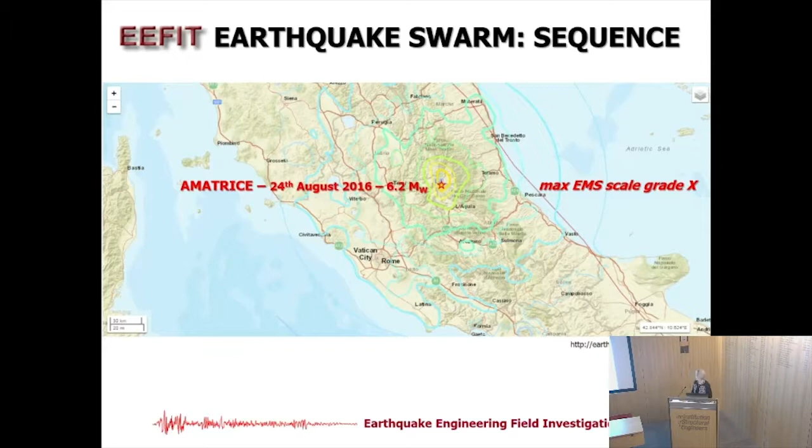Following that, there was a second series of events about two months later, the 26th and 30th of October. The second of these had a magnitude of 6.5, and the epicenter was some 50 kilometers northwest of the first one. Finally, this year, less than a month ago, on the 18th of January, there was a third event of smaller magnitude, 5.5, about 15 kilometers southeast of the first event.

As you can see, the three epicenters are basically on a straight line, which identifies the fault that runs through Monte Vettore, as we will hear later, and that is responsible for much of the seismicity of these areas.

The events of destructive magnitude, especially the first one, were of particular shock to public opinion because of the relatively high death toll—in fact, very high, almost 300 people—with respect to occurring in an area of very modest population density, around 15 people per square kilometer.

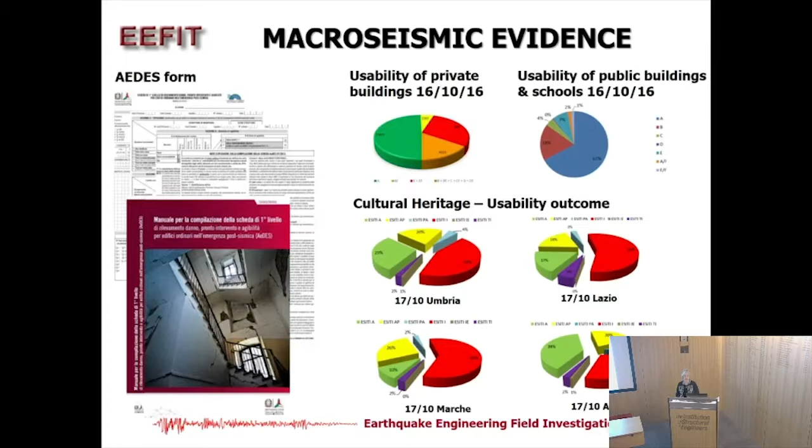On the basis of this, we drafted some first preliminary mission objectives, which I won't go through because they will be clear from the presentation of my colleagues tonight.

I just want to characterize the event a little more by going through the historical seismicity, presented here in terms of events over the last thousand years or so.

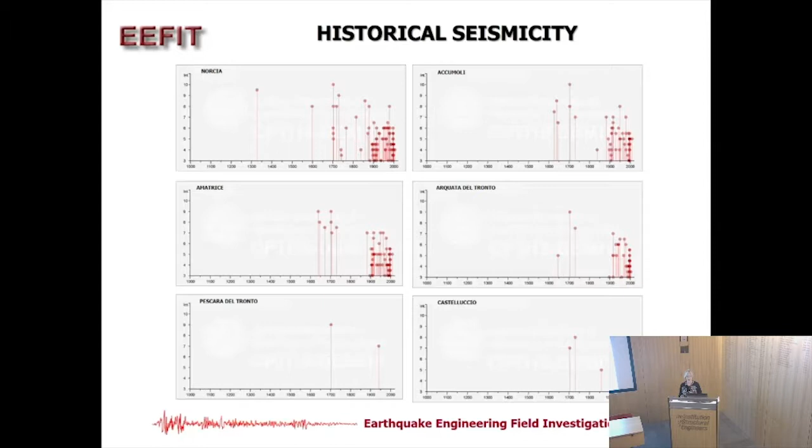We also correlated this with events in L'Aquila, which, as you might have seen from the previous map, is only about 30 kilometers east of the latest epicentral area.

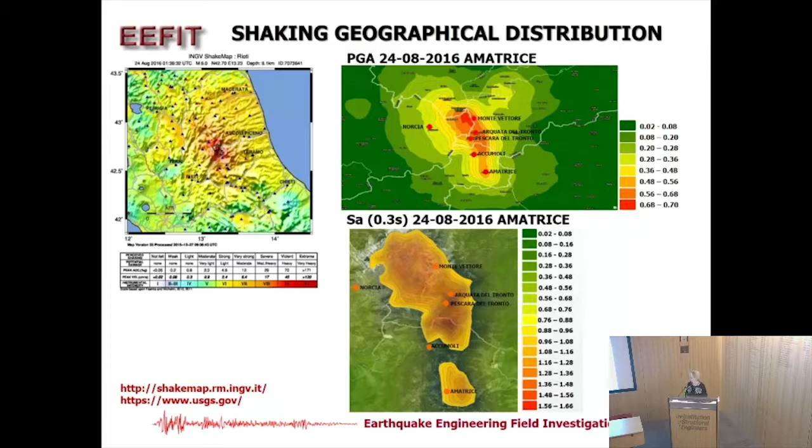This is even more evident when we look at the shake maps, like the one produced by INGV, the Institute of National Geophysics and Volcanology in Italy, and the isoseismal peak ground acceleration distribution at 0.3 seconds, which show very high values of acceleration in this case—among the highest ever recorded on Italian territory, up to 0.7 G for the peak ground, and up to 1.5 G for the maximum amplifications.

The second event, on the 30th of October, had smaller maximum accelerations but a much wider spread area, consistent with the greater magnitude, and also, as we will hear from Zoe, with the greater fault rupture and superficial evidence of this.

This is quite clear from this comparison, but you can see that, for instance, the maximum peak ground acceleration at Norcia was indeed the same value for the two events, although of course the grading is different because the scale is different.

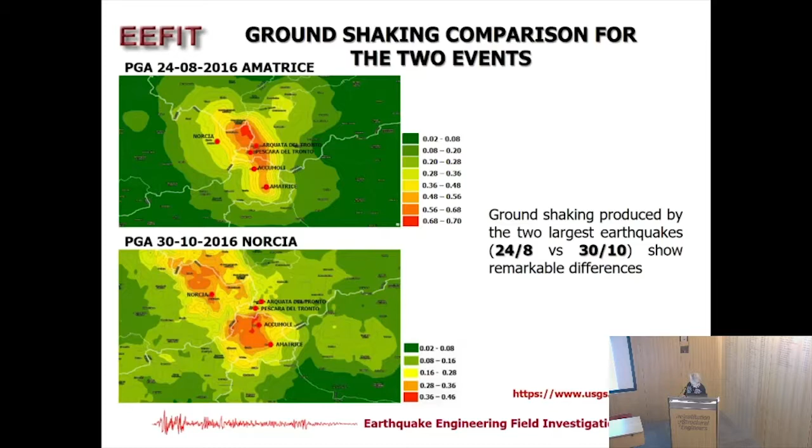In terms of further characterization of the strong motions, the Italian national network has some 350 accelerometers dispersed across Italian territory, which picked up the shaking. I'm not going to present all of these results, but you can access them at Itaca dot MI dot INGV dot IT, and these are indeed some of their results, some of their elaborations.

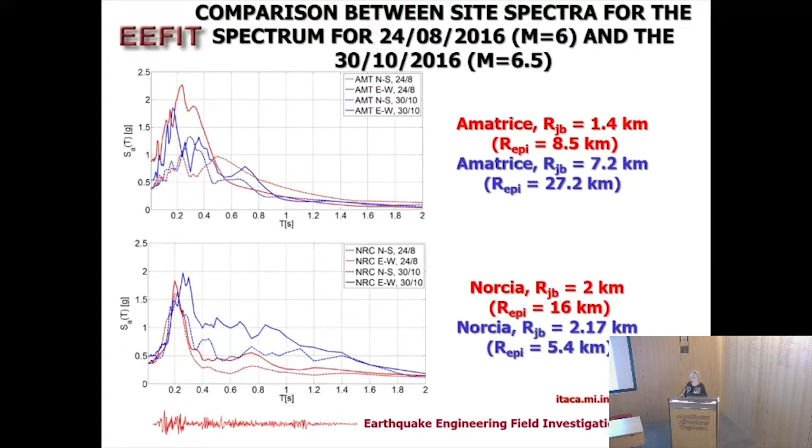Here we are simply comparing the two different events, and it's worth noticing that in the case of Norcia, the second event had a very high level of amplification in the high range of period between 0.4 and 1.2. This will be reflected, as we will see later, in some of the damage we have seen in Norcia in the cultural heritage buildings, and even more so when we consider the records taken by an instrument placed some 150 meters from the main square, very close to the two main cathedrals that collapsed, which Paolo will present later.

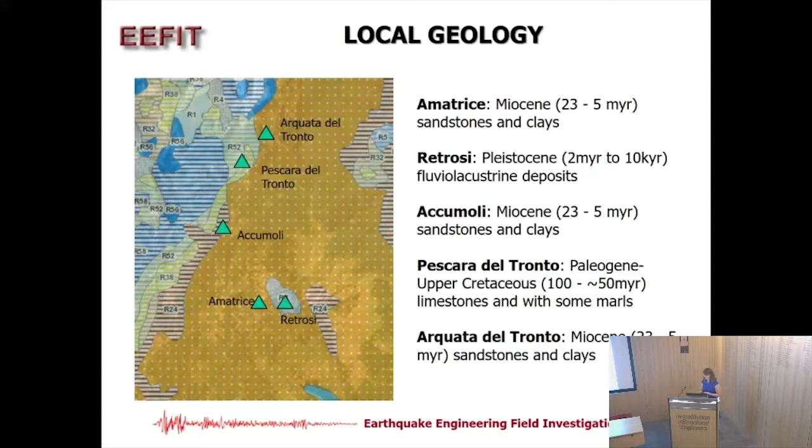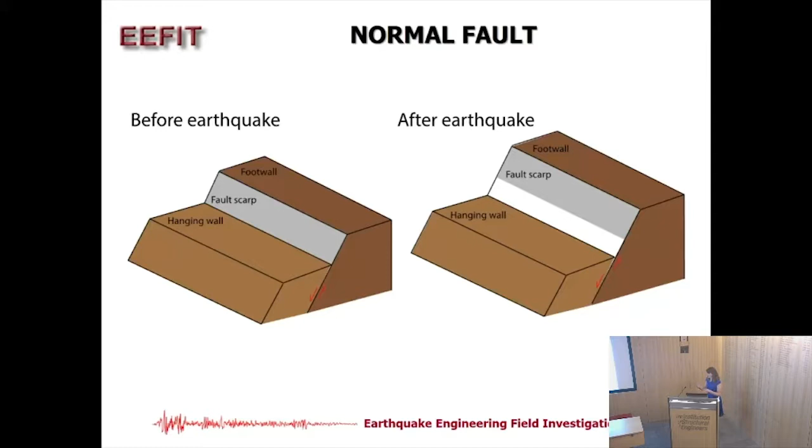A normal fault is shown in this block diagram. We have two sides to the fault. Usually the fault is orientated perpendicular to the extension direction. When the earthquake occurs, one side goes up and one side goes down, and so we can observe these breaks in the surface, which is what I'm going to show you and what we've measured.

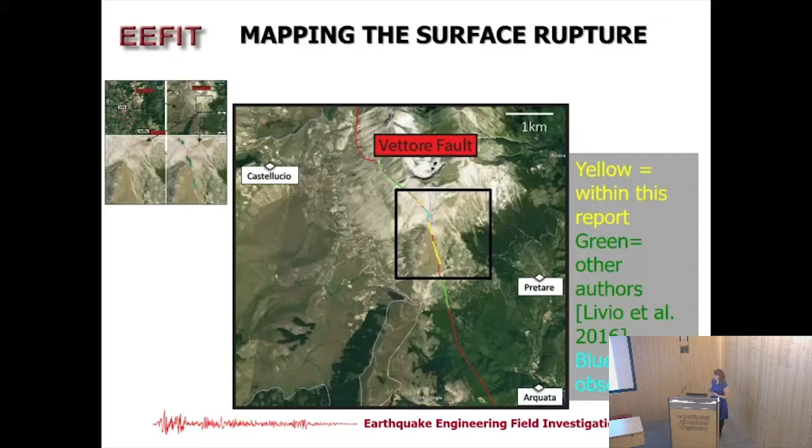This is the area that we focused on, so this is the town of Arquata down here. We focused along the southern part of the Monte Vettore fault. This was also in collaboration with other researchers who had previously been to the areas. We covered the area shown with the yellow lines, and this shows you the number of data points we took. We took hundreds and hundreds of data points.

So what were we actually measuring? This is what we see, with myself for scale. You can see this break, this crack in the ground. That is caused directly by the earthquake slip at depth coming to the surface, so this side has gone up and this side's gone down. So what we're measuring is the size of this offset, the direction in which the offset occurred, and the orientation of the offset.

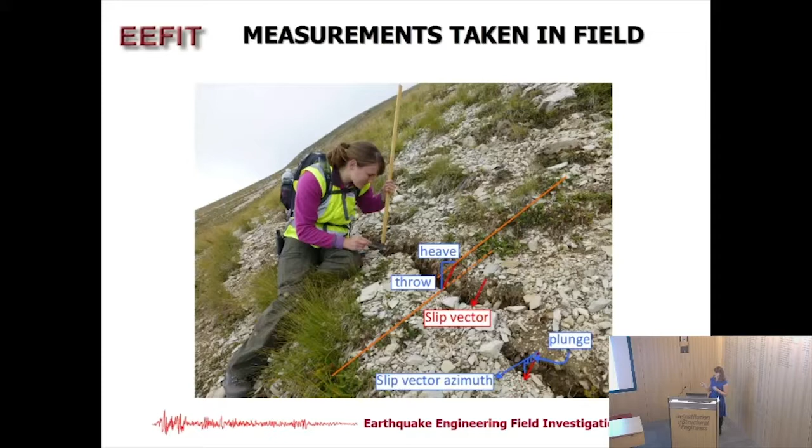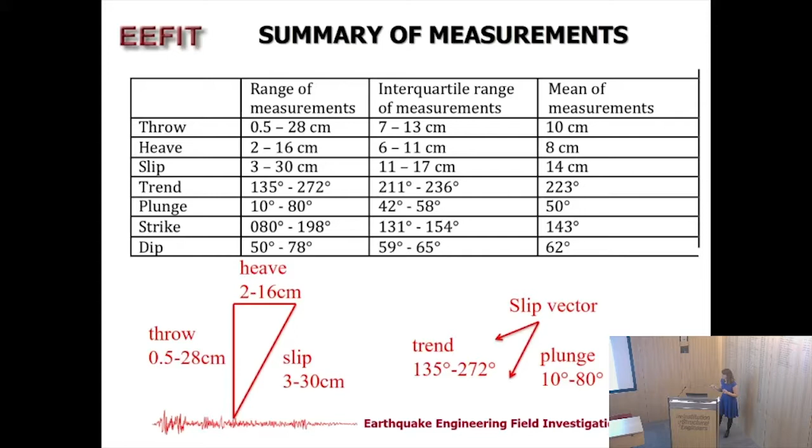This is just another photograph from a slightly different angle, so you can see how the two sides of this offset would join back to, or how the two sides separated. So this is just a quick summary of our measurements. The mean offset we saw was about 15 centimetres, but there's quite a large range, from about 3 centimetres to 30 centimetres. We also saw some other variations in the orientation and the opening direction.

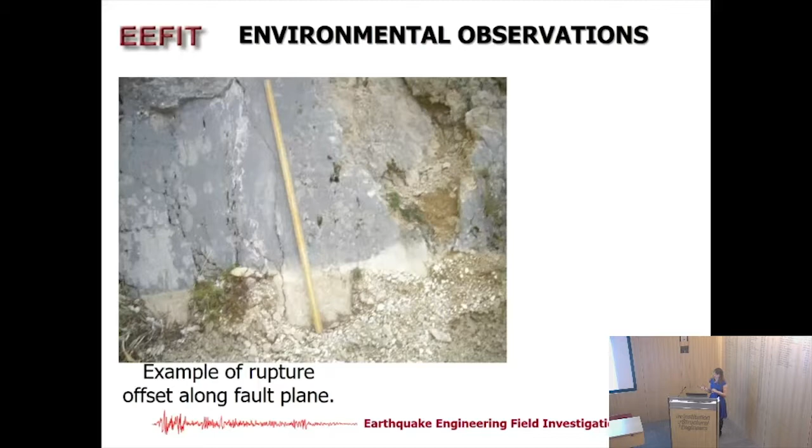And then this is a limestone fault plane, so this has been formed over many, many earthquake cycles. But if you look right down the bottom here, we zoom in, there's a change in colour from this grey, darker grey weathered rock to pale white rock underneath. That white section is what was exposed during the earthquake, so we can see really clearly what the height of this was.

So why do we care about doing this? It's important to look at the geometry of faults because the hypothesis is that the geometry and the strain across the faults and the stress across the faults are interrelated, which then will affect the seismic hazard of the fault. That's why we're making these measurements.

So remember I said that the maximum slip we observed during the EEFIT mission was 30 centimetres. For contrast, these are some field photographs from after the 30th of October rupture. I was in the field 2 days after this occurred with some colleagues.

This was the maximum that we observed, which was nearly 2.3 metres compared to 30 centimetres. At this location, we can actually see the two different earthquakes. You see this grey rock here was what was already exposed. That little pale white stripe, which is about 10 centimetres high, was from the 24th of August, which killed 300 people. And this section down the bottom, this slightly brown section, about just over half a metre, was from the 30th of October. So you can really see the difference between the different magnitude events.

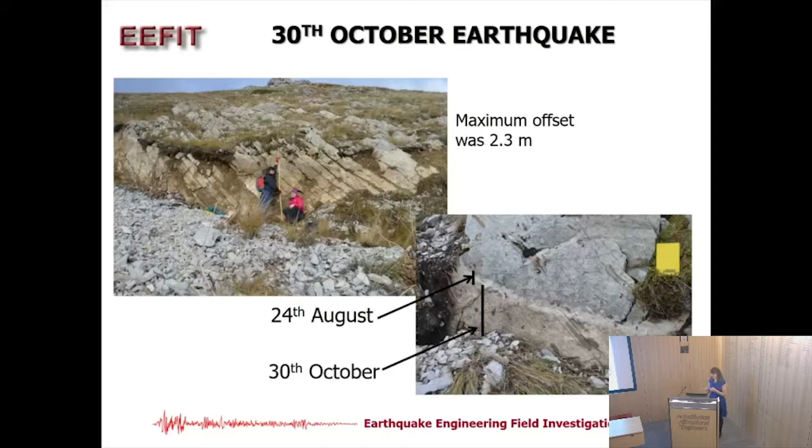So that's my section over, so I'm now going to pass over to Domenico, who will continue talking about the geotechnical observations. Thank you, Zoe.

Thank you. I am Domenico Lombardi from University of Manchester. So I will describe the geotechnical observations made during the EEFIT mission.

The main goals were to locate and characterize the secondary seismic effects. By secondary seismic effects, I mean the effects directly related to the ground shaking. We used these observations in order to determine the earthquake intensity through the environmental seismic intensity scale.

Before describing the geotechnical observations, let me introduce the environmental seismic intensity scale. So we are going to use this scale in order to estimate the macroseismic intensity. This is complementary to the Mercalli scale.

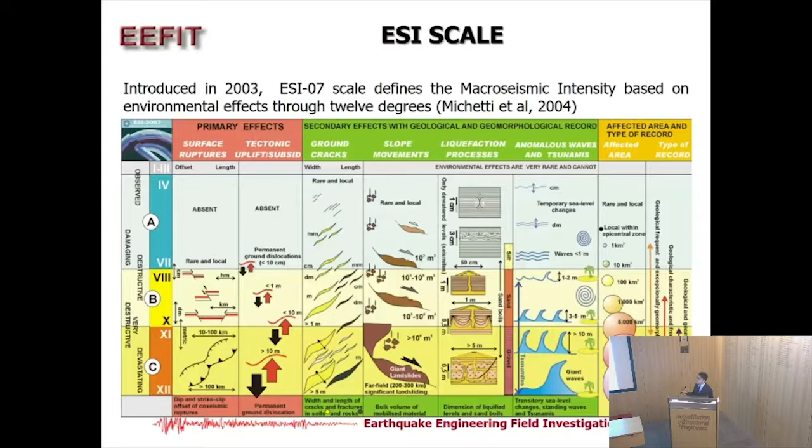We observed a number of landslides located in different areas of Pescara del Tronto, but we are going to focus on two main landslides. One occurred very close to the quarry.

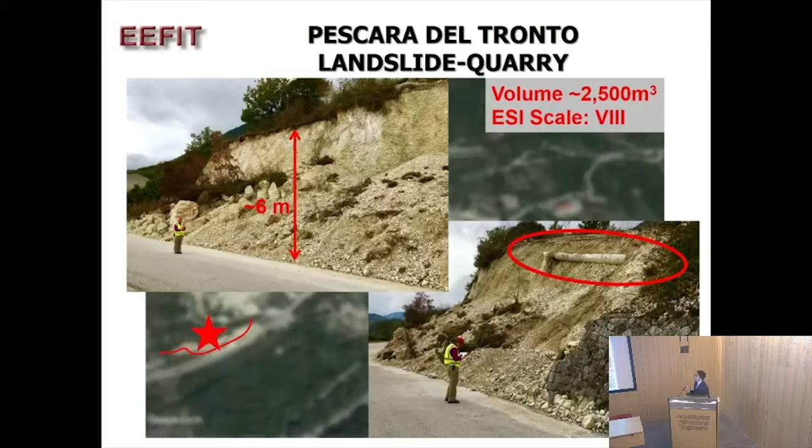Then we focus on a different location, again in Pescara del Tronto. This slope was facing directly over the Salaria Road. On the bottom left is a photograph taken before the landslide, showing the slope was quite steep and vegetated. The two photographs above were taken during the mission, showing the extent of damage.

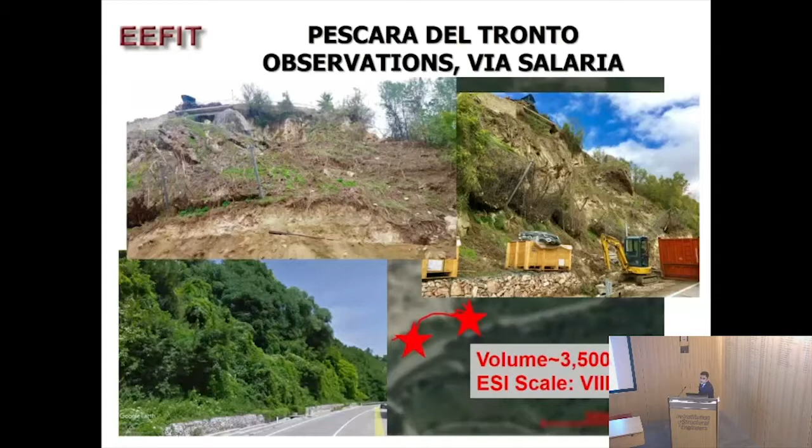Also in this case, the type of movement can be classified as a translational slide. The volume of material displaced was slightly larger than the previous case, about 3,500 cubic meters, which again corresponded to an intensity level of 8.

The quantity of material displaced was significantly larger, on the order of 10,000 cubic meters, which corresponded to an intensity level of 9 according to the environmental seismic intensity scale. Now, let me also touch upon the topographical effects.

Topographical effects are very important because ground motion can be significantly amplified by topographic irregularities. The concentration of damage in Arquata, which is located on the crest of a relatively high and steep ridge, suggested that topographic amplification may have played a major role in this high concentration of damage.

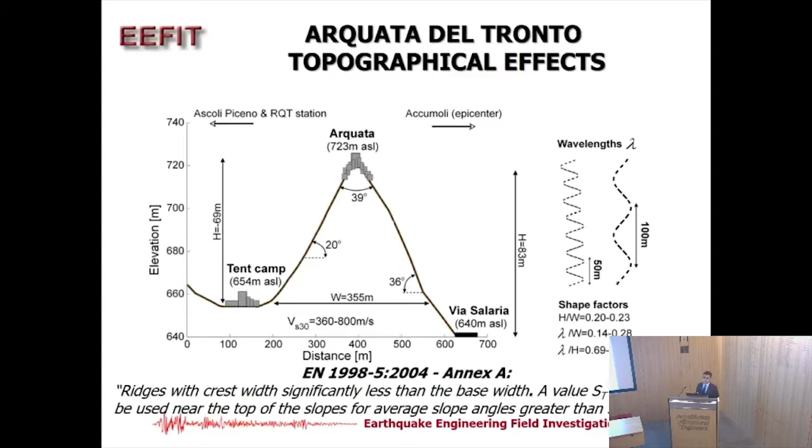We also surveyed a number of dams. In particular, I'm going to focus on the Campotosto artificial reservoir, which is worth mentioning as one of the largest artificial reservoirs in Italy. It is impounded by three dams: one earth dam located to the northwest in Poggio Cancelli, and two concrete dams, one in Rio Fucino and one in Sella di Pedicate.

We didn't observe any significant damage to the dams, and we are not aware of damage caused by subsequent events. However, there are major concerns because of the presence of an active fault, which is crossing the concrete dam in Rio Fucino. I will now hand over to Valentina.

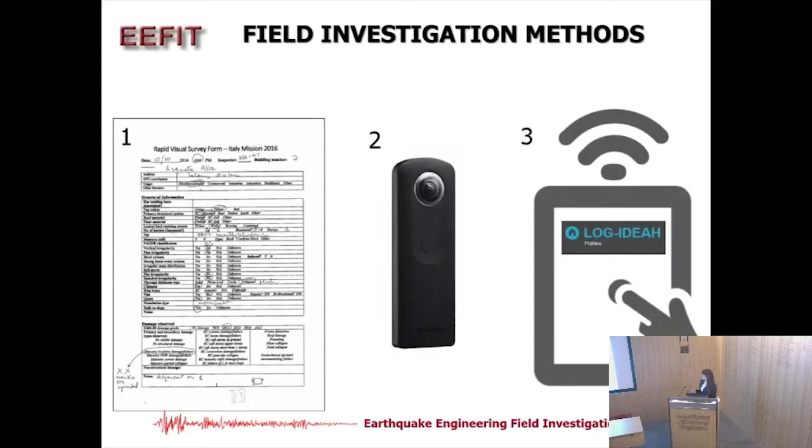The three main investigation methods we used on site were rapid visual survey form, omnidirectional cameras, and the web-based knowledge expert tool called LOG-IDEAH.

Rapid visual survey forms have been extensively used in other EEFIT missions. In our case, we tailored our form to accommodate the information needed for the Italian building stock, both masonry and concrete structures.

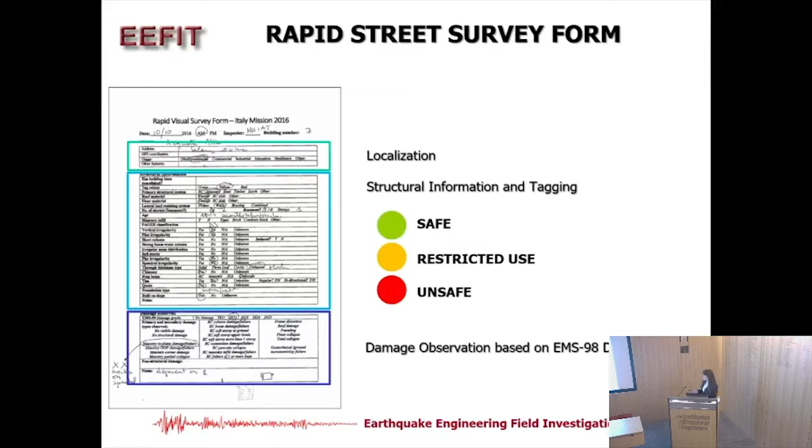It takes no more than 10 minutes to be filled and is made of no more than 30 entries, and is divided into 3 main sections: localization, structural information and tagging, and damage observation based on the European macroseismic damage scale.

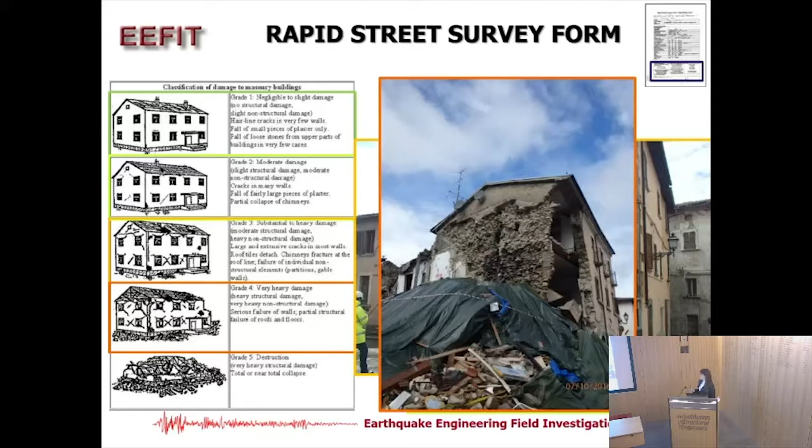360 cameras came to help when the time to be spent on site was very limited, especially in red zones such as Amatrice. If collected in sequence, 360 images can be uploaded on platforms such as Mapillary and then reused to review collected data or eventually integrate missing data.

It has been used for the first time during the 2011 7.2 Van earthquake in Turkey, and it has extensively been improved since then, and it was also used during the last EEFIT mission in Ecuador.

And finally, LOG-IDEAH, which is the web-based knowledge expert system for damage collection and failure mode identification based on logic trees for identification of damage due to earthquakes for architectural heritage.

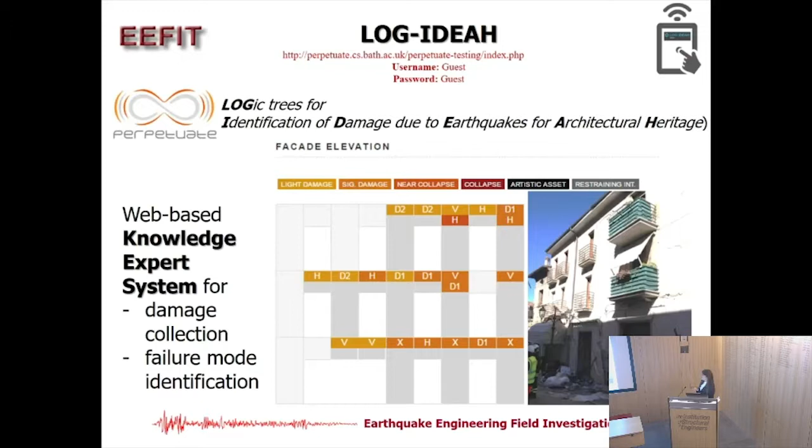It has been developed by Novelli and D'Ayala within the Perpetuate project, and it has been extensively used during other case studies such as L'Aquila, Algeria, and Slovenia, Ljubljana. It is open source and readily available online.

So what were the limitations we encountered when we were on site? First of all, the very limited time to be spent within red zones, the very limited access to buildings, and the very widespread level of damage.

In terms of rapid visual survey results, we plotted our results based on the tagging classification and the EMS-98 damage scale. What we understood was that the level of damage that we recorded was quite widespread, as well as quite different among the cities we had the chance to visit when we were on site.

Especially if we look at the case of Arquata del Tronto Bassa, more than 60% of the buildings were rated as safe buildings, and only 40% of the buildings as restricted use.

Few meters away from Arquata del Tronto Bassa, in Arquata del Tronto Alta, more than 80% of the buildings were rated as restricted use, with only a few cases of safe buildings and completely collapsed buildings.

The major number of buildings that were rated as unsafe was in Amatrice and Pescara del Tronto.

In relation to the damage that we collected on site, and according to the European macroseismic scale, we were also able to give an intensity degree to each one of the cities we visited.

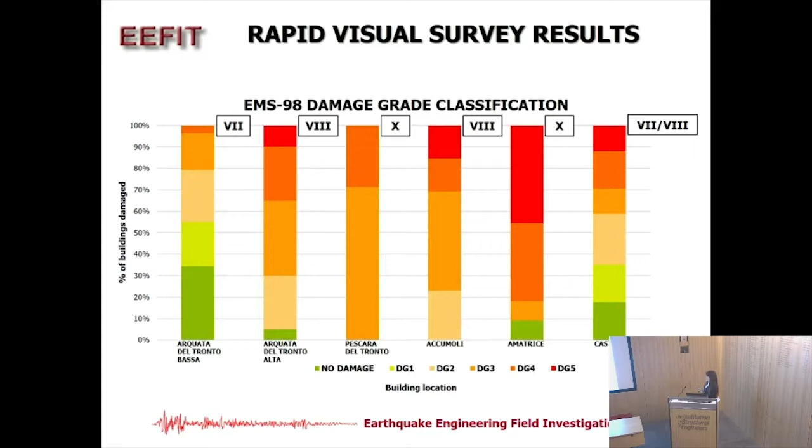For instance, in the case of Amatrice, the level of damage was graded 10, as well as Pescara del Tronto. In the case of Arquata del Tronto Alta and Accumoli, the intensity grade was 8, and in the case of Arquata del Tronto Bassa and Castelluccio, the damage grade was 7.

We then mapped our results to see the extent of improvement going from the damage we collected through rapid visual survey, to the data we were able to improve by using 360 images.

We then compared it with the available online satellite images, the satellite images provided by Copernicus, which is a service that activates in the aftermath of any hazardous event, providing information and aerial views of the damaged area.

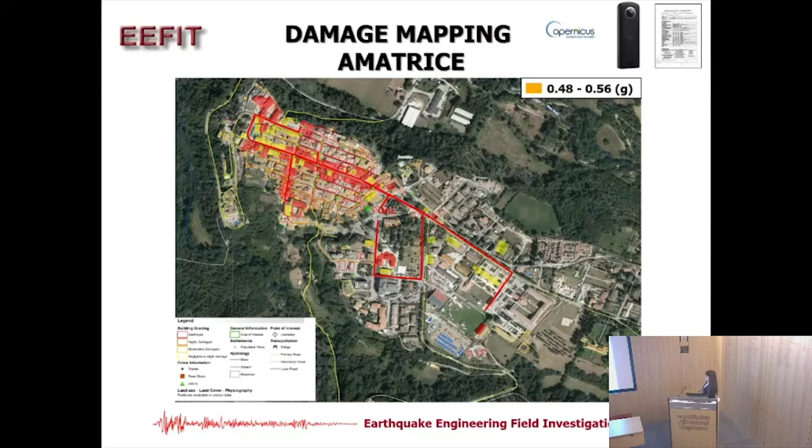In the case of Amatrice, where the extent of damage was quite widespread, the two layers of map were corresponding quite well, as in Pescara del Tronto, where the two layers of map were also able to correspond quite well.

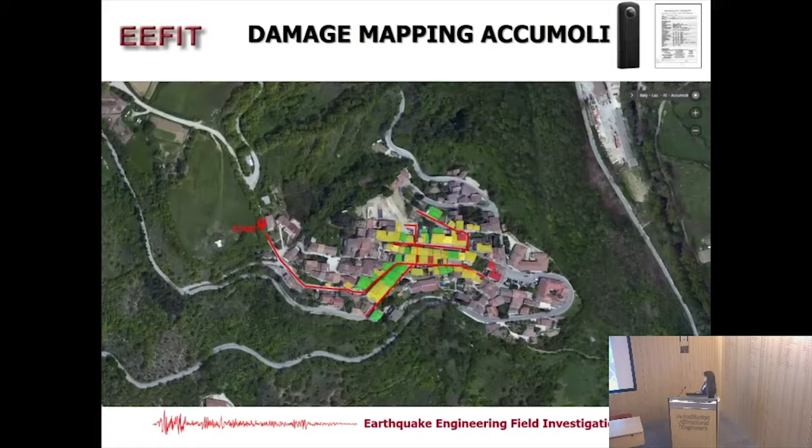The difference stays in Accumoli, where, of course, the extent of damage was far less compared to the previous cities. As is possible to see from the overlap of the two maps, the extent of mismatching is quite important. The same in Arquata del Tronto.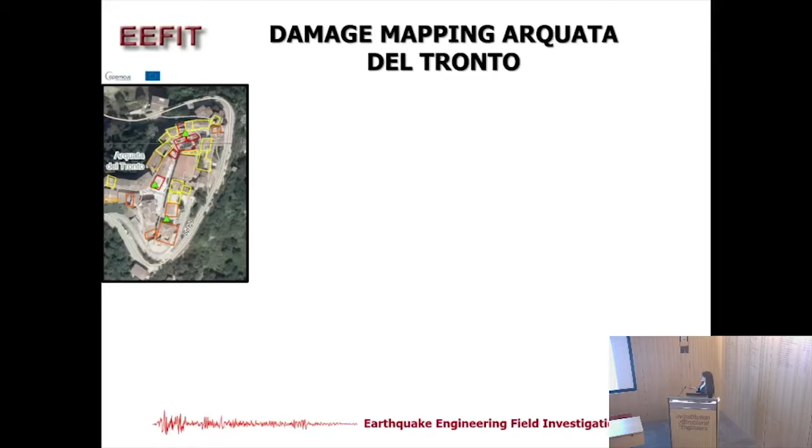In this case, we pointed out this building, which is the City Hall building located in Arquata del Tronto Alta, which, based on the Copernicus map, wasn't even marked as potentially damaged, while when we were on site, we were able to see the real extent of the damage of this building.

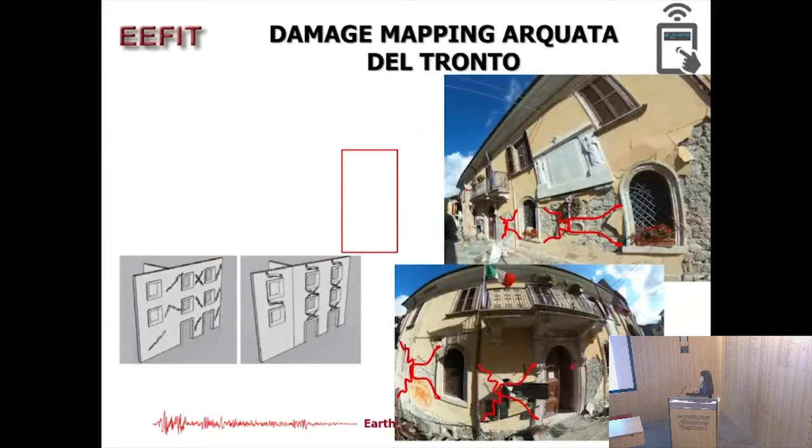We analyzed it using LogIdea, which, based on the geometry of the building itself, the layout of openings, and the position of the cracks, was able to give us the most probable collapse mechanism for this particular case, which is actually the in-plane failure of piers and spandrels characterized by X-shaped cracks, which we were able to see on site.

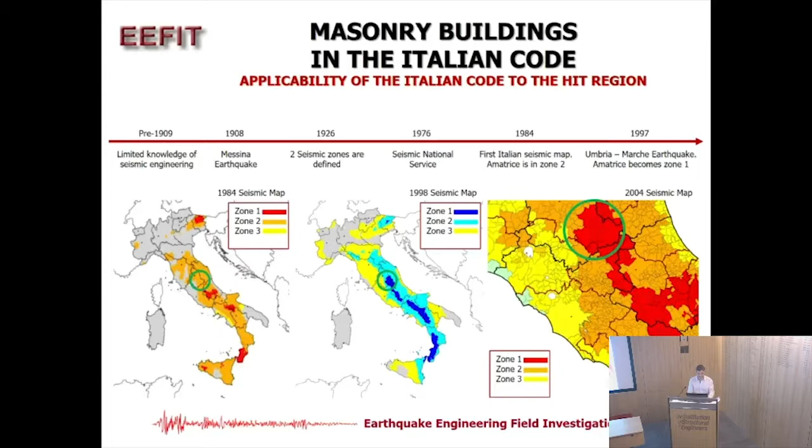In this first slide, we would like to understand the development of the Italian seismic code during the 20th century. After the Messina earthquake, there was a big push in terms of research and codes being deployed in Italy. For example, in 1926, two seismic zones were defined, but it's only in 1984 that Amatrice was classified as seismic for the first time, as seismic zone 2. Then in 1998, Amatrice was classified as seismic zone 1.

In terms of code requirements from the Italian Seismic Code, we have analyzed both the currently applicable NTC08 and also the codes that were in use during the 80s. The idea here is to provide a benchmark of what an ideal masonry building should look like, and then to assess the observations and damages against this benchmark.

So in terms of structural concept, of course there is a recommendation for regularity. The building should be as much as possible symmetrical in plan and regular in elevation. This is not compulsory, but it's highlighted and recommended by the code.

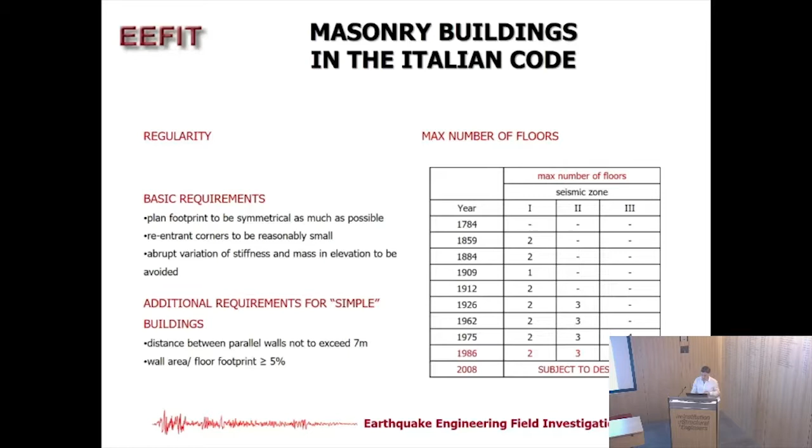In terms of requirements for the materials, it is important to notice that brickwork with artificial squared blocks in concrete or hollow pots are allowed. Squared natural stone is allowed, but unfortunately in Amatrice rubble masonry is not permitted, and by the way, it was not permitted to have buildings more than 2 stories even during the 80s, in the DM86.

As we have said, Amatrice only became seismic in 1984, so all the prescriptions we have seen so far were not really applicable in Amatrice before 1984, and therefore it is worth understanding what strengthening measures for existing buildings were prescribed in the DM86.

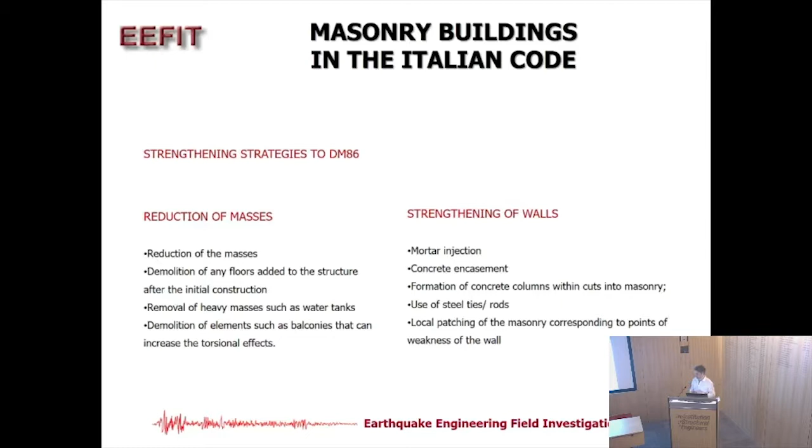Obviously there are two strategies. The first is the reduction of masses, which in honesty we have not seen on site. The second is the strengthening of the structures and the walls. There are many possible approaches. The first was to build concrete ring beams at roof level in order to tie all the masonry walls together and enhance the box behavior of the structure.

A second approach would be to provide a concrete encasement to the masonry walls in order to improve the confinement, which would be beneficial especially in case of cavity walls. And then again, mortar injection to enhance the mechanical characteristics of the walls, or steel rods that would prevent the walls from falling out of plane.

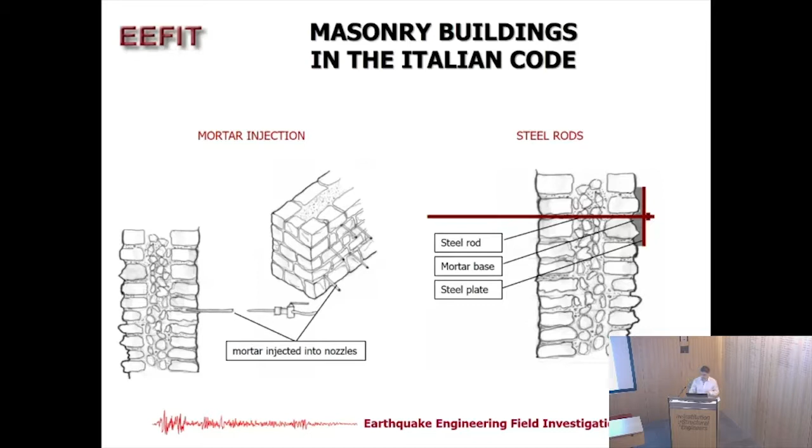Now, this provides again a basic benchmark for the ideal buildings or the technologies that were in place to strengthen an existing building. What we have observed on site during our mission is slightly different from what you would expect for a new building in Amatrice today, and this can help explain the reason for such a level of devastation.

In terms of number of floors, both in Amatrice and Accumoli and Arquata del Tronto and Pescara del Tronto, we have seen buildings up to 3 and 4 stories, so 15 to 16 meters.

Many 2-story buildings, but unfortunately many 3 to 4 story buildings, and this is a major key driver to explain all the damages that have occurred.

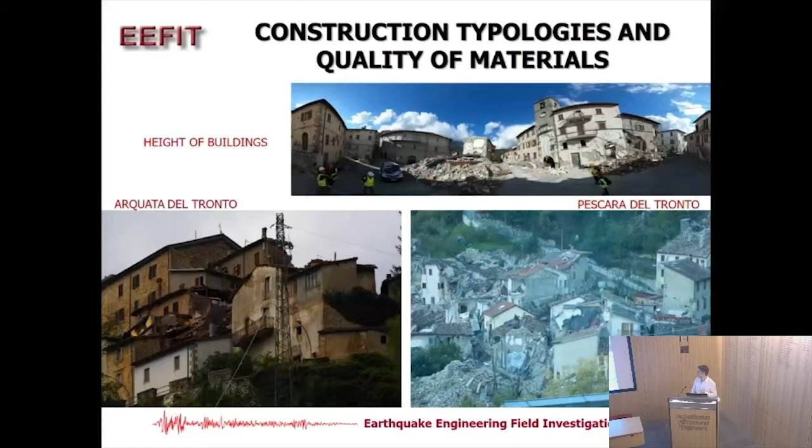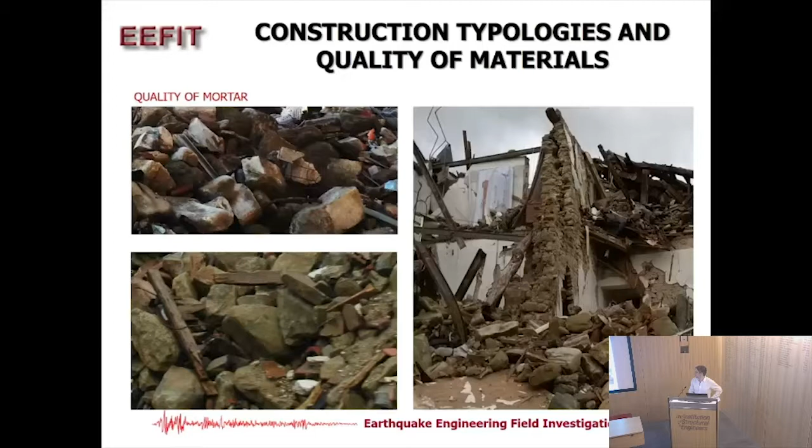In terms of quality of materials, we have seen very poor quality, especially in terms of mortar and use of natural stonework with non-squared rubble masonry. This is also very relevant to explain the extent of damaging. As you can see from these pictures, the mortar was absolutely ineffective, and all these buildings have collapsed as a result.

In terms of damage observation, we have seen a number of different damages. In all those cases where the buildings could behave as a box, it has behaved slightly better than others. Although we have seen so many cracks, at least the building is still standing.

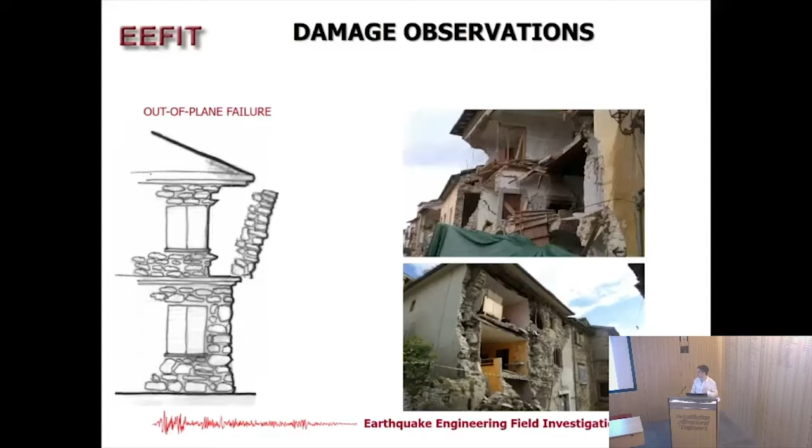While in other cases where we have seen out-of-plane failure of the masonry walls, obviously in many cases this has caused casualties and the full collapse of the building, as you can see in these pictures.

So, to summarize, in terms of the existing buildings, it's possible to say that the bad quality of the materials and the fact that the buildings were too high can be described as the two main reasons for this level of devastation. Now, in terms of strengthening of existing buildings, we have described the various methodologies.

What we have seen on site is that basically there has been a shift between the technologies that were used in the 70s and 80s, and then after the 1997 Umbria and Marche earthquake, a different set of technologies have been used.

In the 70s and 80s, there was a big degree of confidence about concrete, and therefore many concrete encasements and ring beams. But unfortunately, in this case, the use of ring beams has been done in a non-appropriate way, and in fact, a concrete ring beam has become a concrete roof, and this was quite a usual type of situation on site.

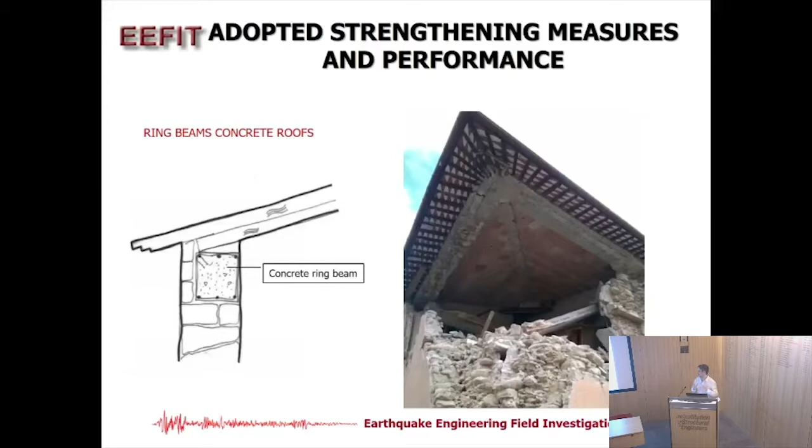So many buildings have collapsed because the ring beam and concrete roof has replaced the existing timber roof, and this is one of the results, for example. So these two approaches, the concrete encasement and the concrete roofs, have proven not efficient and counterproductive somehow.

On the other side, mortar injection and steel ties have proven slightly more performant. For example, with mortar injection, here we can see two pictures. The second one at the bottom shows that the building is almost undamaged, adjacent to another building that has collapsed in Arquata del Tronto, and the first one in Amatrice. There are obviously cracks and damages, but again the building is still standing.

In some cases, especially when steel rods have not been used together with mortar injection, the results have not necessarily been positive. For example, the picture on the left shows that the steel rod is overstressed and the building has collapsed.

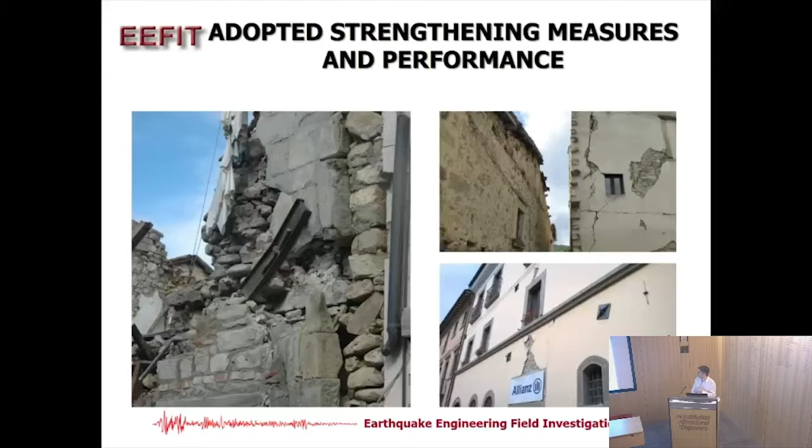On the right, we can see there is an incipient out-of-plane failure of the facade.

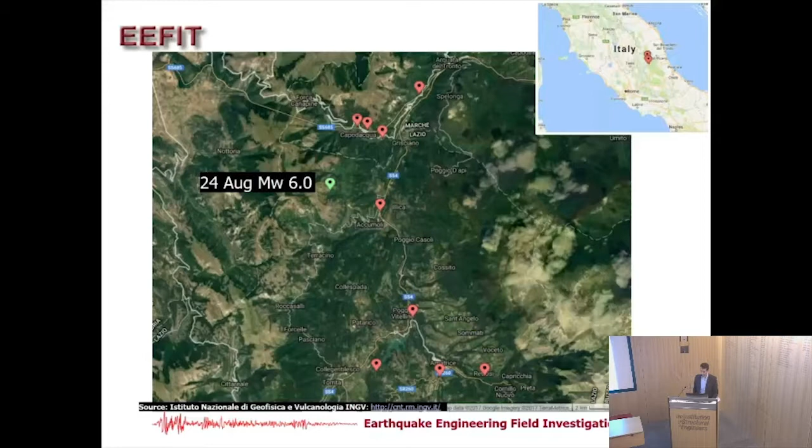This is a map of the area you'll be familiar with, and each single red point shows one of the bridges, one of the structures we had surveyed. We won't see them all tonight, unfortunately, but this is just to give a flavor of the type of structures we observed. We see masonry bridges, which are the ones that suffer the most, and a range of concrete bridges, particularly concrete viaducts on highway structures.

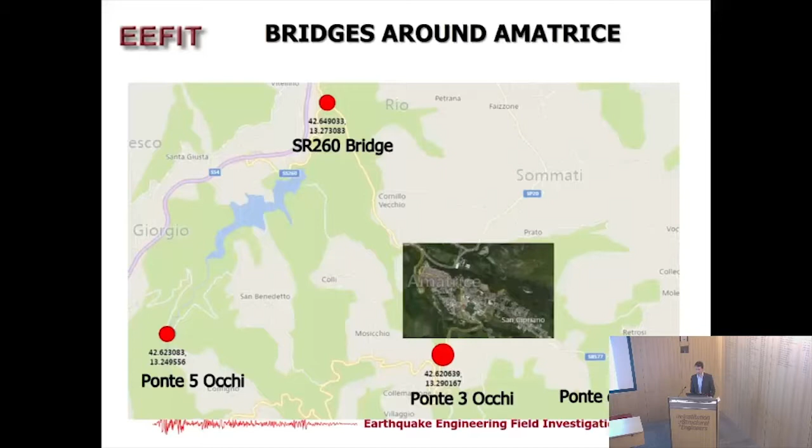We will focus around this town of Amatrice, where we observed a range of bridges in the surrounding area, and each road leading into Amatrice has a bridge that has been affected by the earthquake, and this caused lots of issues in terms of providing access to the emergency services straight after the event, and it was quite bad. It made also national news.

We will focus on this particular bridge. It's called the Three Occhi Bridge. Three Occhi means three eyes. You can see these are three arched span structures.

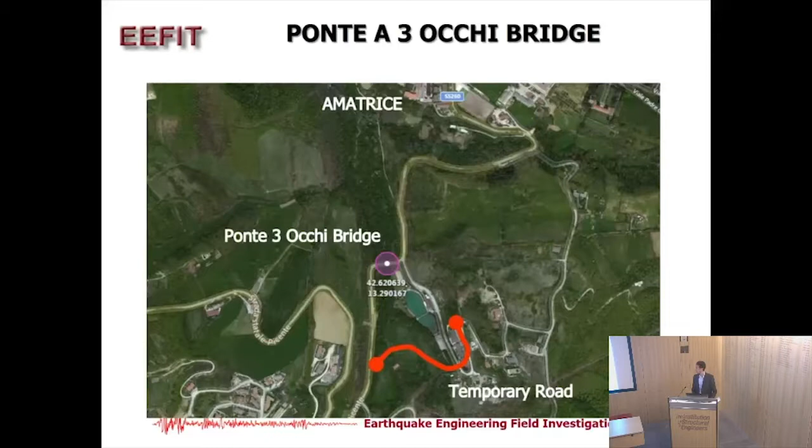This is along the road leading to Amatrice from the south. This bridge is now unusable, and it caused lots of issues, so much so that the army had to step in and build a road bypassing this bridge, including the new temporary bridge that you can see on the bottom right corner. This was completed just a week after the event. This shows how important some infrastructures can be for the rescue and emergency services.

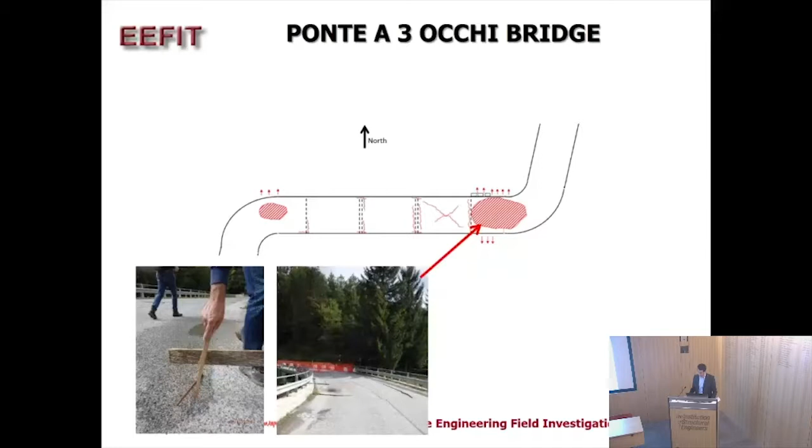This is a plan of the bridge in which I marked up the main damage. The main one being a very large sag by the eastern abutment, in the order of 200 millimeters. This sag originates because of the extensive damage on that abutment. We'll see more of this later. We also observed a range of other damage, both to the piers, to the arches, as well as to the western abutment.

This is a picture of the eastern abutment looking from north. You can see there is a geotechnical failure, effectively a retaining wall, in which lots of material has been lost, and that created part of the sag. You also notice these three vertical buttresses. These are reinforced concrete buttresses which have completely failed, both in shear as well as in overturning.

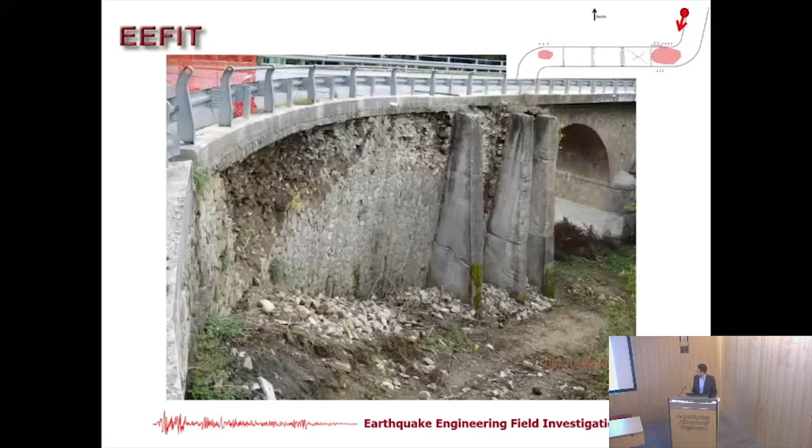I think the buttresses are quite interesting because they're obviously not original to the bridge design, but were added at some point during the lifetime of the structure. That is possibly due to the uneven load condition. You can see the ground level is different - there's approximately a 5-meter difference between both sides of the abutments. This tells us that someone recognized there was a geotechnical issue and tried to do something about it, but obviously that was not that successful.

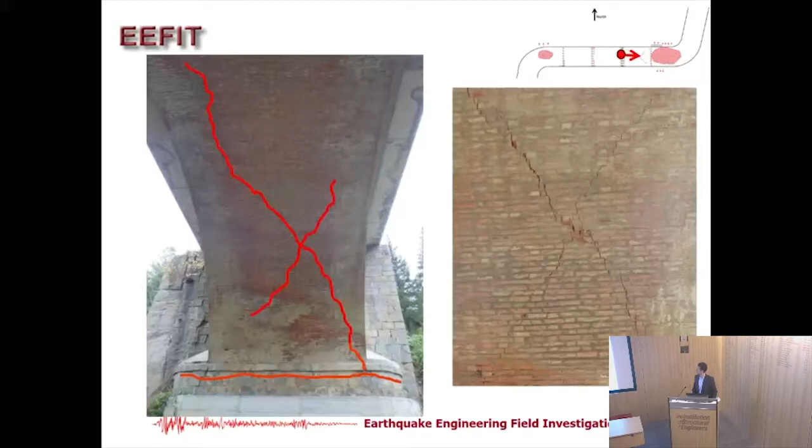The seismic acceleration created the failure of the abutment. You can see the damage we observed on the first vault just by that abutment is also highlighted by the cracks, and the crack pattern is also compatible with the movement of the abutment itself.

Now, looking at concrete bridges, particularly concrete viaducts, we looked really hard for damage. We were really keen to find some damage. Unfortunately, we didn't find much - no, actually, fortunately, we didn't find much. And that is quite extraordinary, especially because most of the structures were not designed for any seismic action. They didn't have any seismic detail, any seismic restraint system.

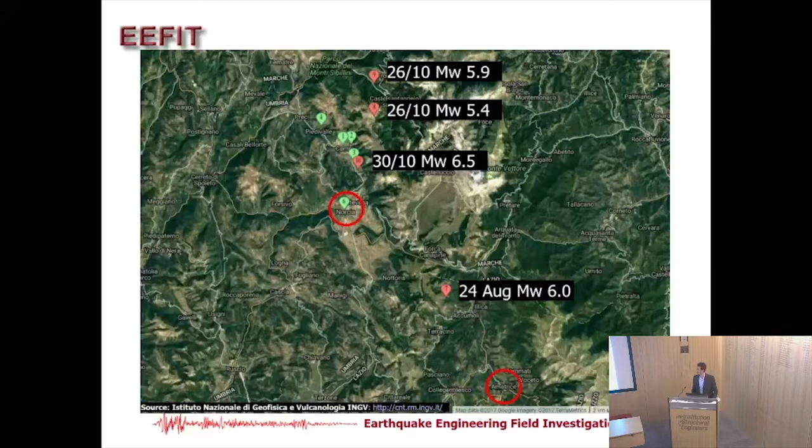We now move on to the performance of churches, particularly a number of churches surrounding the city of Norcia. In green, you'll see the churches that we surveyed, and it's worth noting that we were there on the 9th of October. We obviously observed the damage after the 24th of August earthquake, but the situation on the field changed substantially since we've been there. We have pictures, and I did a follow-up visit in December, so we will be able to see the evolution of the damage in certain cases.

These are a number of damages that have been observed throughout the many earthquakes that have unfortunately occurred in Italy. It is recognized that churches, being a certain building typology with certain element types and a broadly known proportion, suffer certain damage, and we'll see some of these later on in some churches.

I'm going to move from north to south. I'll start with the Sant'Eutizio Abbey, which is quite a spectacular abbey complex that dates back to the 5th century. We focus on the main building, which is in the middle of the complex - the church, a simple single nave church with a timber truss roof.

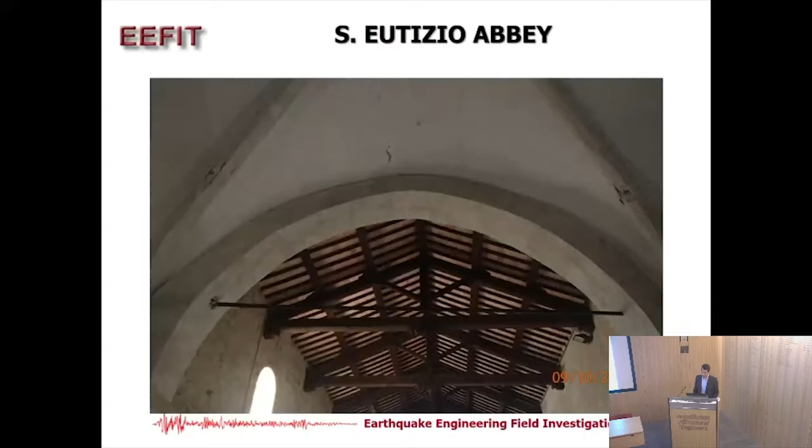This is the chancel arch just above the altar, and there is clear evidence of a 3-hinge mechanism there. In fact, we can observe cracks at the springer, at the arch crown, as well as the other springer, where there's evidence that the tie has been quite successful at restraining this arch.

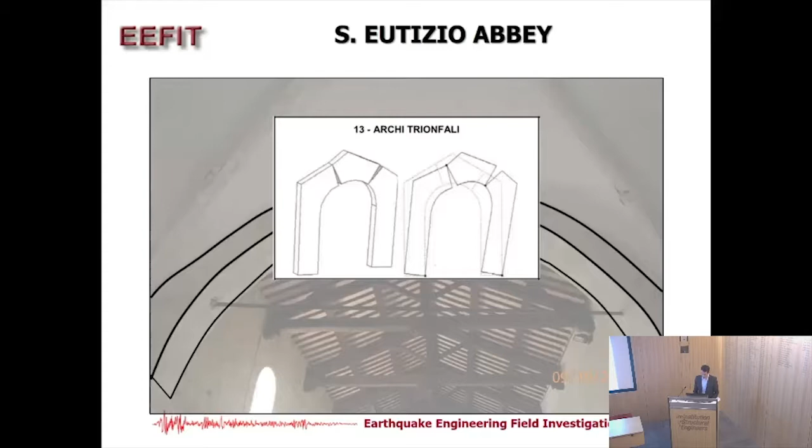In fact, we can see evidence of pull-out there. And this is how that form I showed you earlier identifies this particular damage.

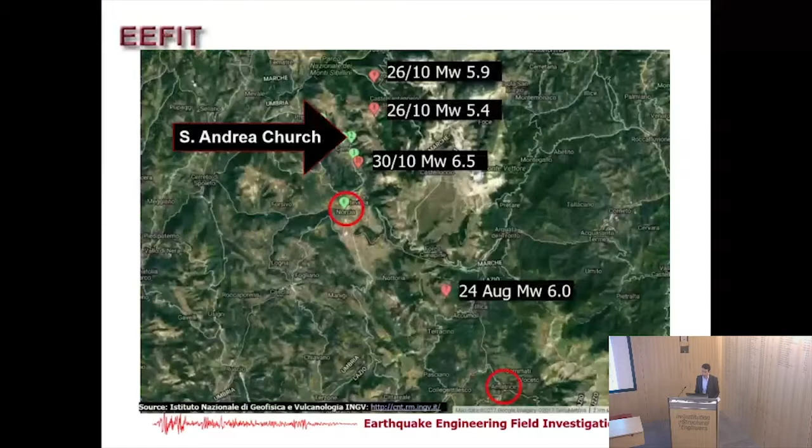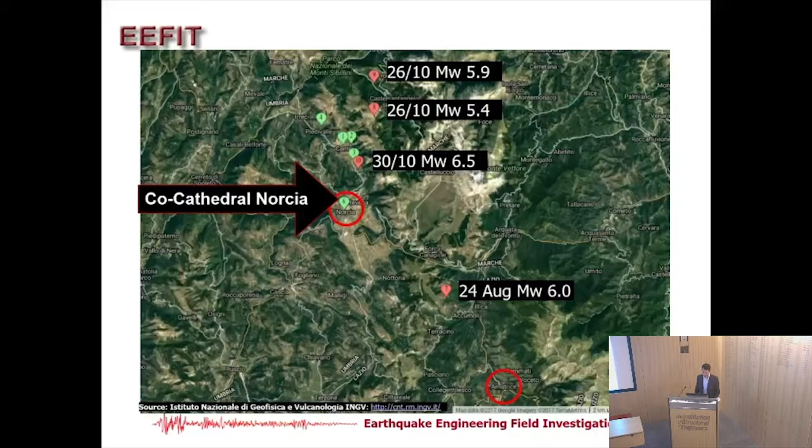Finally, we go down to the city of Norcia. You might have seen some of these churches on BBC, as they made national and international news. We start with the so-called Co-Cathedral of Santa Maria, just on the main piazza of Norcia. It's a very large church with a main nave and two side aisles.

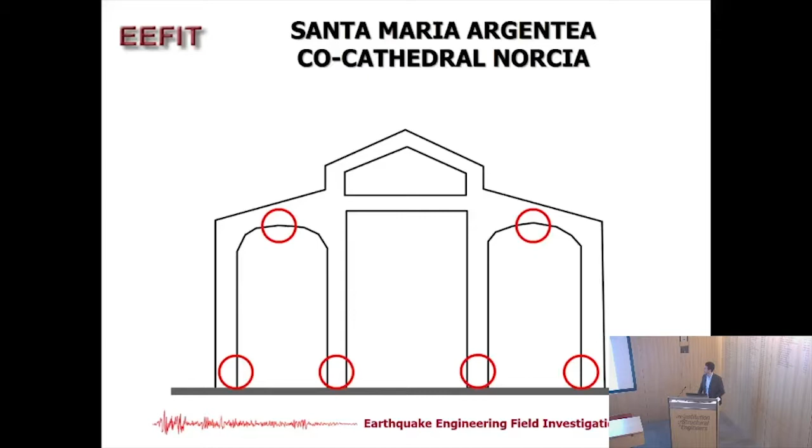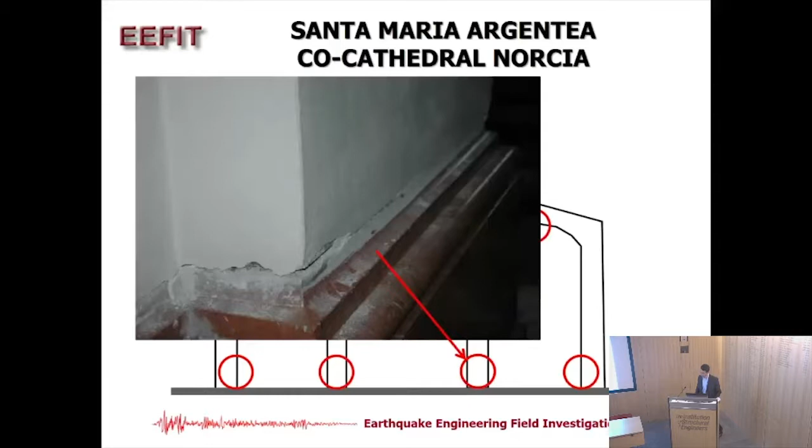This church also had a roof made after 1979, and was damaged by the earlier earthquakes. Here we observed a portal frame type of mechanism, where the church behaved as an entire structure in the east-west direction, transversal to the church's main direction. In particular, we observed horizontal cracks on the side walls on both sides, longitudinal cracks on the vault's crown, as well as horizontal cracks at the central piers on both sides, highlighting the cyclical nature of the movements. The east-west direction is the main direction of shaking, as Dina highlighted earlier. This is how the mechanism is identified in those catalogues.

Another mechanism we observed was a possible overturning of a portion of the facade, in particular the facade gable. After the 30th of October, we can see how that mechanism eventually led to partial failure of the facade. A rough estimate of the first mode of vibration of the facade, as a standalone cantilever, is on the order of 0.1 seconds, which is in the region of high acceleration, as Dina pointed out earlier.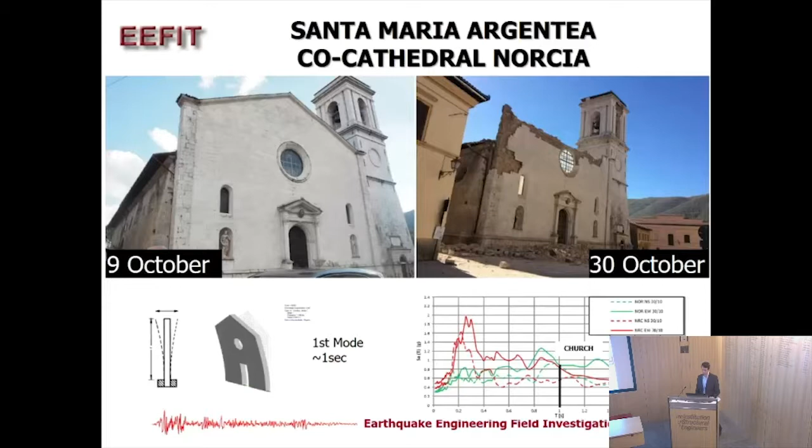Moving on to the next church, just adjacent to the previous one, is the main cathedral, the Santa Maria Argentea Cathedral. You might have seen videos of this church with people evacuating it. When we were there, we observed widespread damage, particularly on the side walls. We also observed damage similar to the Sant'Eutizio Abbey, between the purlins and the rose window, but we couldn't quite identify any evident mechanism in this church.

What happened after the 30th of October was almost complete destruction of the church itself. Evidence shows that the bell tower on the right-hand side collapsed onto the building. If you observe this picture, taken just after the earthquake, you'll see no debris on the road coming from the bell tower. Also, the diagonal plane of failure of the bell tower is compatible with the tower overturning onto the building.

The walls on the sides towards the bell tower suffer much more destruction than the walls on the other side. Also quite spectacularly, the facade is still standing as a standalone cantilever, whereas the rest of the building behind it is completely demolished.

Interesting to note, accounting for the geometry of this facade, the period is a bit longer, on the order of 1.5 seconds, in which there's a much greater reduction of acceleration in the spectra recorded.

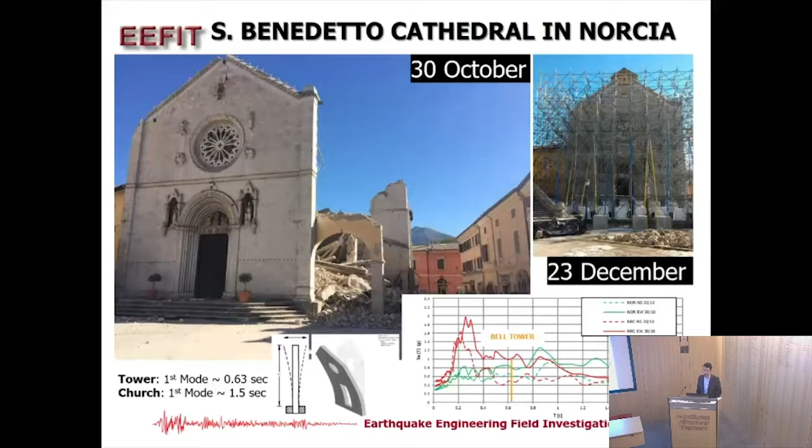When I was there on the 23rd of December, there was a temporary shoring placed in that church. I'm now going to conclude with a short video that shows the relationship between the two churches.

This is the first church that we already observed. You can see the roof has already collapsed, completely collapsed. Then we look at the other church, in which we can see the remaining facade still standing. This is evidence of the bell tower that has collapsed onto the building itself.

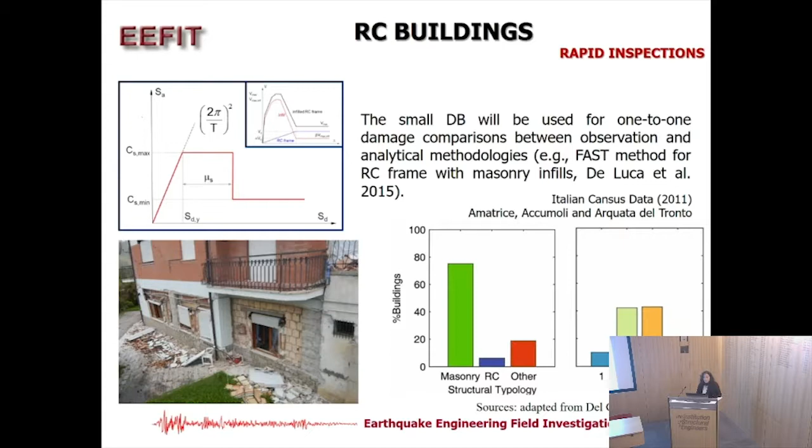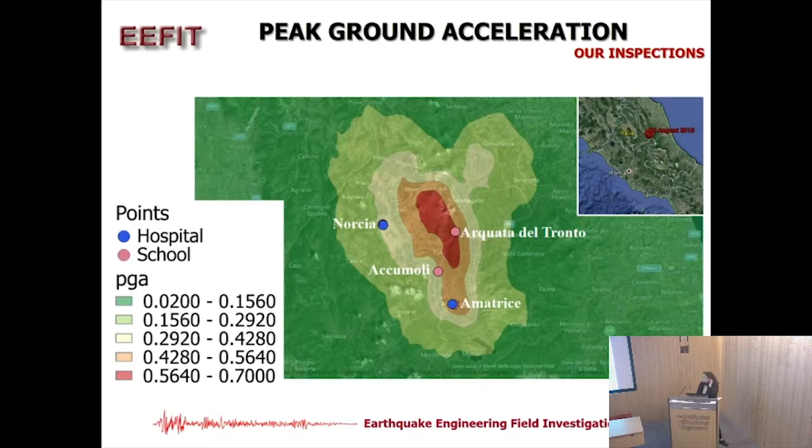Now, this is just a view of the macroseismic intensity map with the critical buildings we visited, in particular hospitals and schools. This is the macroseismic intensity, and this is the peak ground acceleration. In this case, the data are from the USGS.

Now, just one note about schools, because we call them critical structures, and they are a critical aspect all over the world. But in Italy, the collapse of a school has also been a turning point for our building regulation. After the 2002 Molise earthquake, after the death toll of 27 children because of the collapse of a school, we had what I like to call the Copernican revolution in terms of both seismic classification and seismic provision in Italy.

And as Davide has shown, actually the area that we have visited is classified as a red zone. Since then, a lot has been done, and many programs have been made in Italy on the safety of schools.

One thing I want to point out is that the Ministry of Education has a web portal in which you can not only look for all the schools and look at the performances, information about the school in general, but also information about the building in which the school is realized. The only problem, because I was going through this database to find more information about some of the schools we investigated, is that this database at the moment is not fully populated.

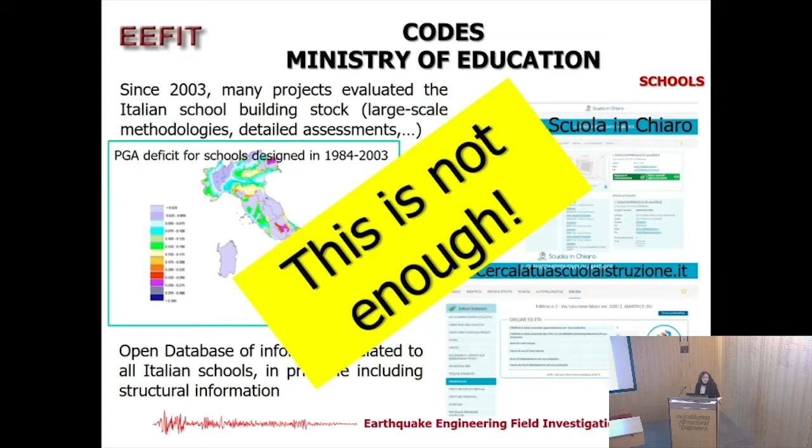So the thing is that a lot has been done so far, but for sure it's not enough, as I will show you through some of the damage we have seen.

The first school I'm presenting is the Capranica school. Actually, this was a building made of three different units. It has a masonry part and two RC parts. The reason why this building is one of the most discussed right after the earthquake...

...is that after 1997 there were some intervention and retrofitting actions done on this building. The results after the August earthquake are what you can see, and actually the masonry part of the building completely collapsed. The thing is that the kind of interventions done on the school were mostly related to the RC part, in which you can see some FRP application to the columns. The problem is that the funds to retrofit the school were not enough, or actually the amount of funds for this school was not enough to make a full retrofitting.

And this is just to show, this school suffered very significant damage. What I'm going to do now is show you some other schools very quickly, the Accumoli schools.

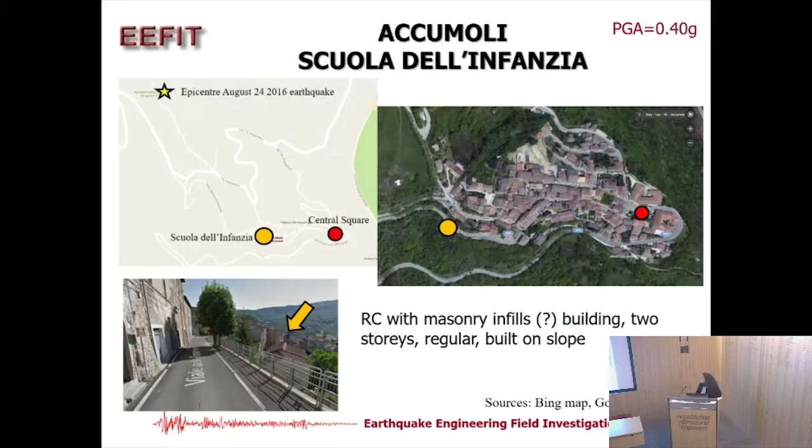That was an RC building with masonry infill, in which the damage we classified was limited to medium.

Then we have NORCIA. We visited two schools there, right outside the city center. I also pointed out the San Benedetto church that Paolo showed you. When we visited NORCIA, the level of damage was very limited, and in particular the Istituto Tecnico Commerciale was fully functional.

This building is an RC building. Now I'm going to show you a situation in which the retrofitting done right after the 1997 earthquake was quite successful. Steel bracing was applied to the first floor, and in terms of damage, what we observed were just very limited cracks.

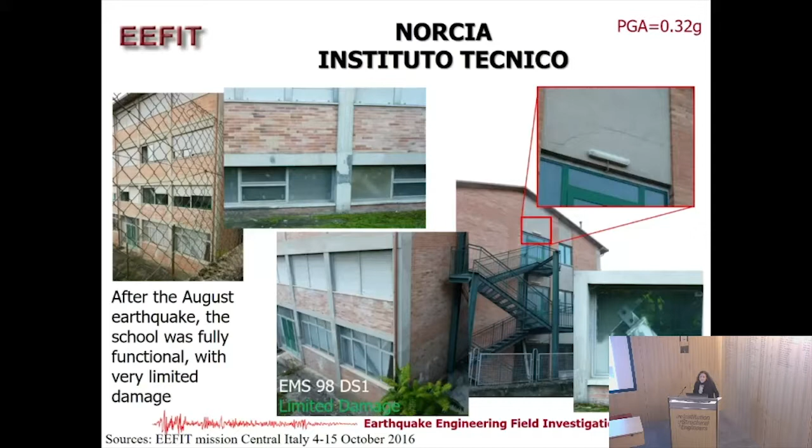This is a picture I took from the news of the same building right after the 30th of October earthquake. You can see that even if there is some damage, more significant damage to the plaster, there is still no structural damage at all.

This is another building, another school, that was a masonry building, not in use at the time. It was considered not usable, and we pointed out some of the damage observed for the school.

The other two schools I'm going to show you are in ARQUATA, where, as Domenico pointed out, there was a very high amplification. The PGA, according to the USGS map, is 0.64 G.

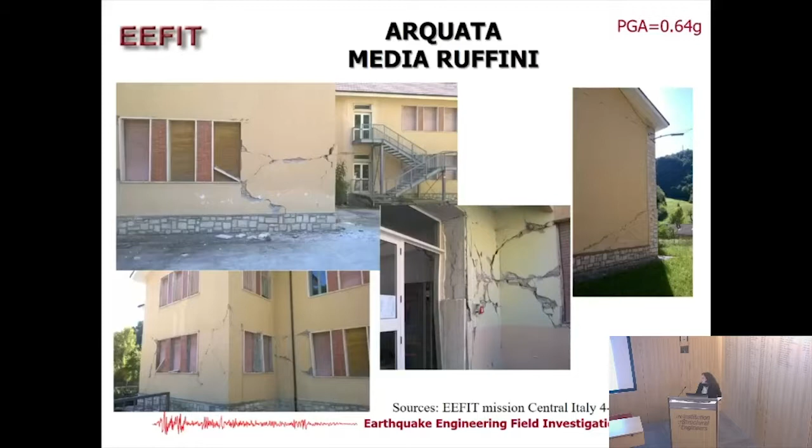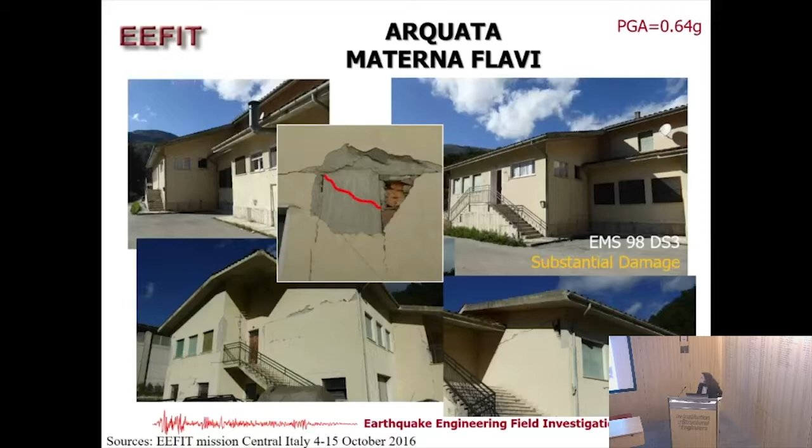I also collected some data on the Grifoni Hospital, one of the two hospitals we visited, where there was also evidence of some concrete spalling, and we made some preliminary comparisons.

What I'm going to show you is just a simple proof of concept about the fact that some of the fragility curves calibrated based on Central Italy data, so L'Aquila data, given the PGA registered for this event, can predict what damage would occur versus what was actually observed.

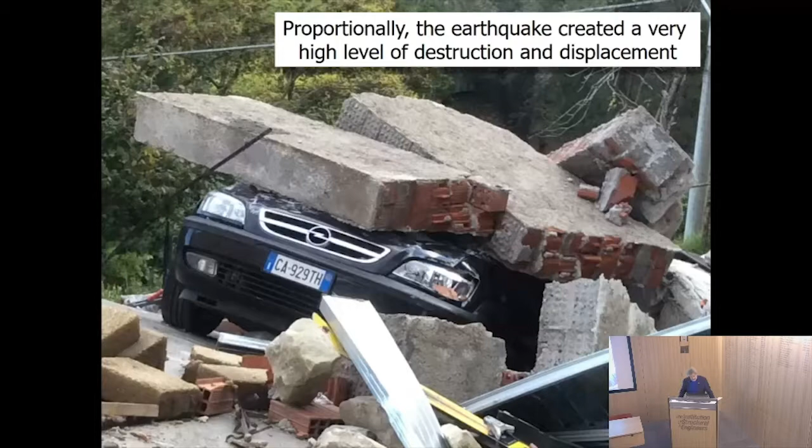That added to the situation and caused considerable displacement of people, although according to a well developed and articulated plan, where they would be moved from tents into temporary accommodation in hotels or with relatives, and finally into transitional housing, which was being planned when we were there in early October. They hope to have it ready between now and the end of the spring.

In the meantime, there were many difficult personal problems and processes coming to terms with bereavement, for example, and very high levels of destruction that brought us back to recall certain key incidents in the 2009 earthquake. For example, the death in L'Aquila of Ilaria Placentino and her very young son, which was one event that significantly moved the population there.

This brought us also to ask whether the work of Anthony Wallace a long time ago should be re-evaluated, in that he discerned a disaster syndrome, and elements of that were definitely there in the population at Amatrice. I think this deserves re-evaluation, particularly in light of cultural differences there.

What did people do? Well, one aspect that did betoken a little social solidarity was that young people in Arquata del Tronto set up a Facebook site to provide information to the population. I'd like to say a few words about information very briefly. They were fulfilling a role that the authorities really had not fulfilled adequately, and they were very proud of the fact that they were also interviewed by the BBC.

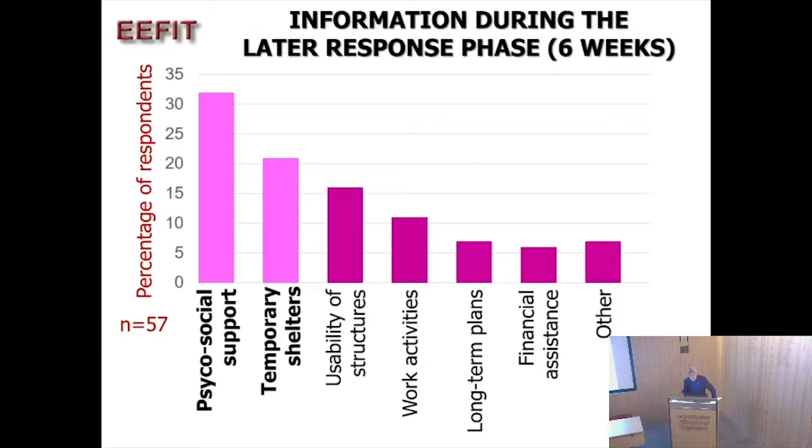What did people want to know about at the later stage? We were there about 6 weeks after the initial event. Psychosocial support and temporary shelters dominated the demand for information, but once again, face-to-face communication still prevailed, and the situation had not particularly changed. So I think we could say that official sources of information were firstly not giving out information very systematically, and secondly not using modern means that the population had considerable access to.

We also asked about awareness of long-term issues, not among the population this time — their awareness was very low. Planning was going on, and it's quite good planning, but there does seem to be something in Italian culture that, although the planning may be good, the communication of it very often isn't.

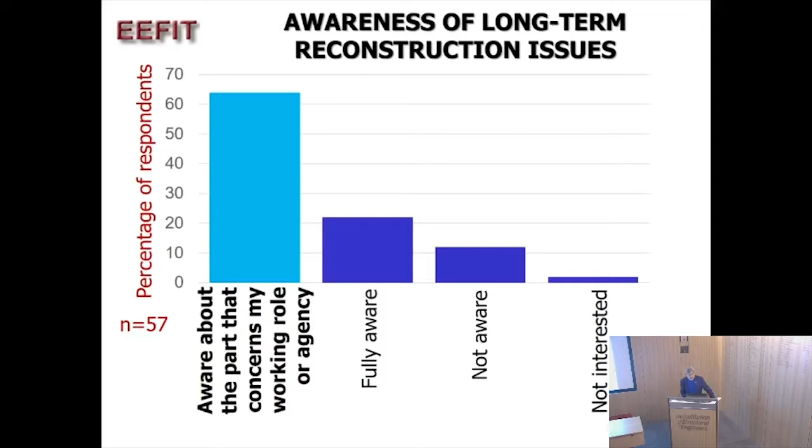But we asked the rescuers and the emergency forces what their awareness of the reconstruction and longer-term issues were. Generally, they had a good awareness regarding their own organisations, but there was little in the way of a common operating picture, in other words, sharing information between organisations about what was going to happen next.